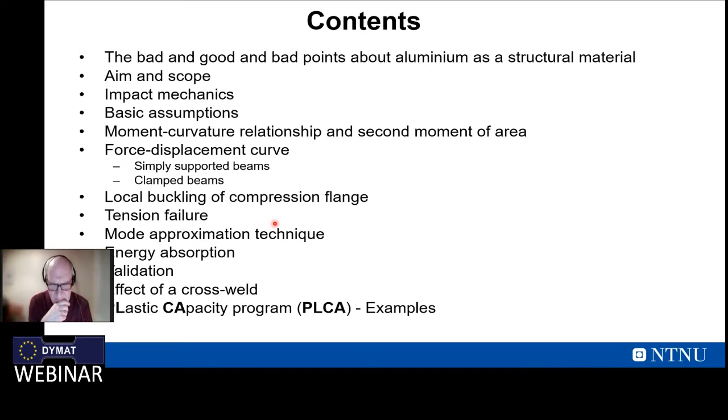Everything I've presented is then gathered in a spreadsheet. We call it the PLCA program. So at the end I will give a few examples.

Aluminum, the bad points: I suppose you know that aluminum costs much more than steel. But if you have a structure and you get a 50% weight reduction by using aluminum instead of steel, the price for the aluminum structure is more or less the same as for the steel structure. But remember, then you have a 50% weight reduction.

Effect of temperature: aluminum weakens more than steel, which can of course be a problem. We have a link to buckling, and the elastic modulus is lower than steel. This also has an effect on deflection.

When you weld aluminum, you have a heat affected zone where you have reduced mechanical properties locally, which can affect localization of strains when you have large deformation of a structure. Fatigue limit is lower, and thermal expansion is twice as much as steel.

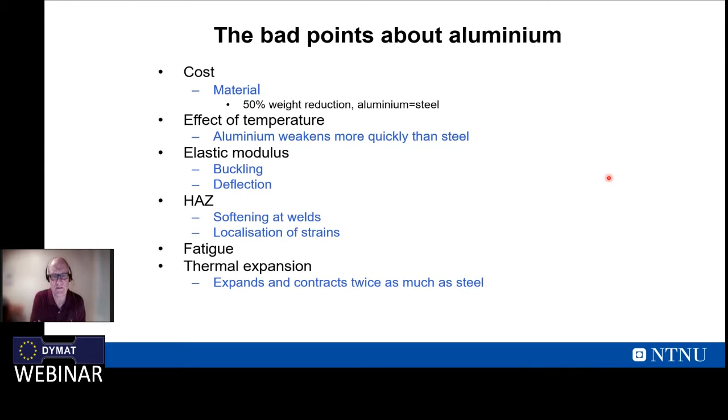So why do we use aluminum? Well, the good point is that low weight has a huge impact on what happens in the automotive industry today. We have electrification and the battery is quite heavy, so you need to reduce the body weight of the structure. Aluminum is a chosen material for this.

For instance, if you have the extrusion process, you can extrude a cross-section which you design on your own. It's quite cheap to extrude.

Recycling is very efficient - when you recycle a material, you use approximately 5% of the energy needed to produce primary aluminum. And 75% of the aluminum today is recycled, as I understand.

You have low temperature performance, so when you go down in temperature, you increase the fracture stress, increase the fracture strain, and so on. It's non-rusting, has good machinability, and also good energy absorption capability.

If you look at specific energy, for instance, which is the energy absorbed divided by the mass of the absorber, it's much better than steel. That's why today, for instance, you have bumper crush box systems in aluminum.

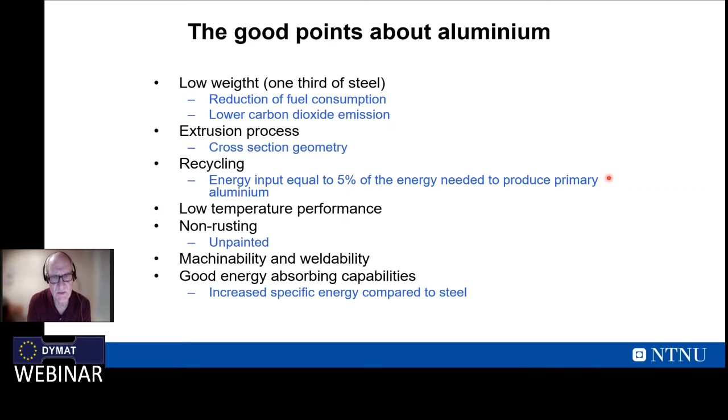I can give an example here. This is an Audi TT, and the body cell weight here is 206 kilos. By introducing aluminum here, you're able to reduce the body weight by 48%. You see that you have only steel at the rear part here - the rest is castings, sheets, and the blue is extrusions.

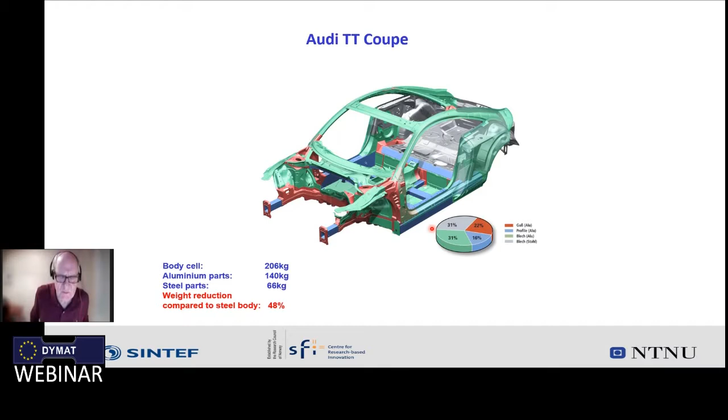And I can tell you that also in this new Audi e-tron, there are approximately 800 kilo of aluminum.

In the oil and gas industry, there is also a lot of aluminum, in living quarters. This is a tension leg platform, it's a floater, and definitely the weight on the top side is critical. To reduce the weight, you, for instance, use aluminum. I will not go into more detail, but this is a very interesting material in the offshore oil and gas industry.

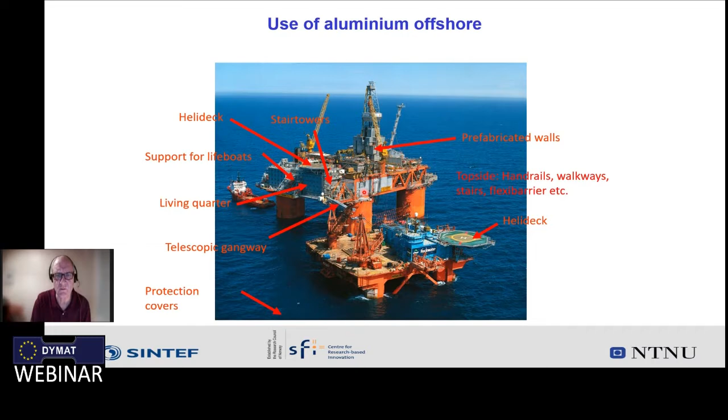So the aim and scope of this is to study the behavior of aluminum beams subject to impact loading. Focus is placed on support conditions, cross-section geometry, impacting mass and velocity, as well as material properties.

If you know the design code, Eurocode 9 for aluminum structures, all cross-sections are in class 1 and 2. This is linked to the b-over-t ratio of the element composing the cross-section. The energy absorption here is linked to material failure on the tension side and local plastic buckling on the compression side. And then I will also show the effect of welding.

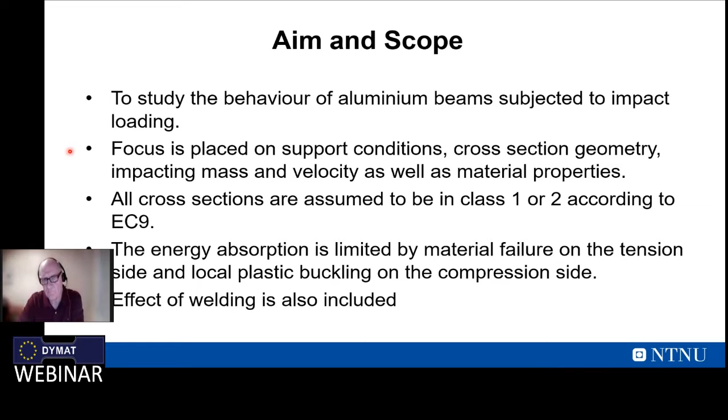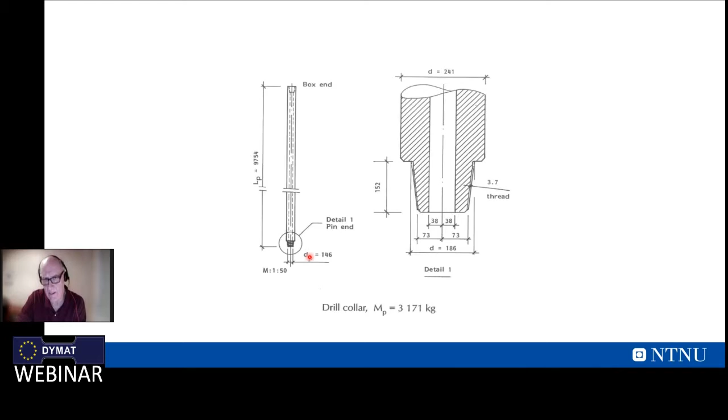And how to study the deformation? At that time we had only one high-speed camera, and we had to use 120 meters of film - we had no video camera at that time. To study the movement or deformation of the plate when impacted, we used some pins with crosses, and then we were able to film the crosses and study the movement.

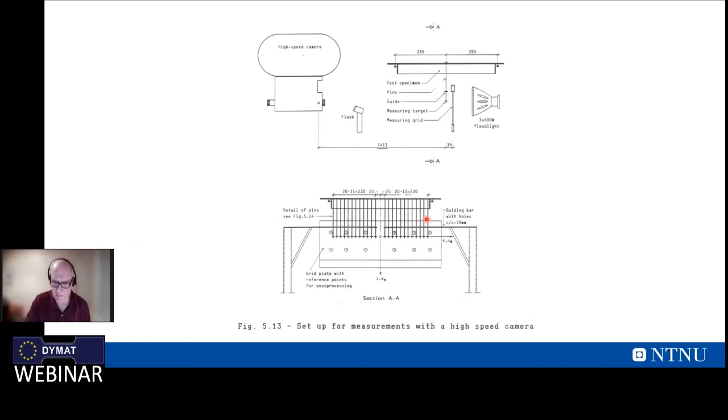Here you see what happens. This is at time t equals 0, and then the pin starts to move as a function of time. At time 1.1 milliseconds, the disturbance or wave has moved all the way to the supports. Here is also some numerical simulation done in the 80s, and you see clearly a circular disturbance moving towards the supports.

Actually this was done on LS-Dyna, by John Hallquist himself, when he was working not at LS-Dyna but at Dyna 3D, at Lawrence Livermore, at the lab at Livermore, before he started his own company.

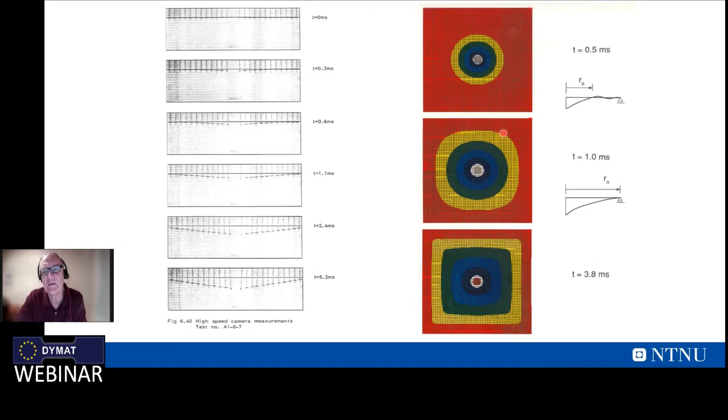This is the force-time curve - the force between the plate and the impactor as a function of time. The first part is where the support does not record any forces. Here the forces and supports are fully activated. If you transfer this into a force-displacement curve, you see the supports are fully activated, and a lot of energy is absorbed in the transient phase of the impact.

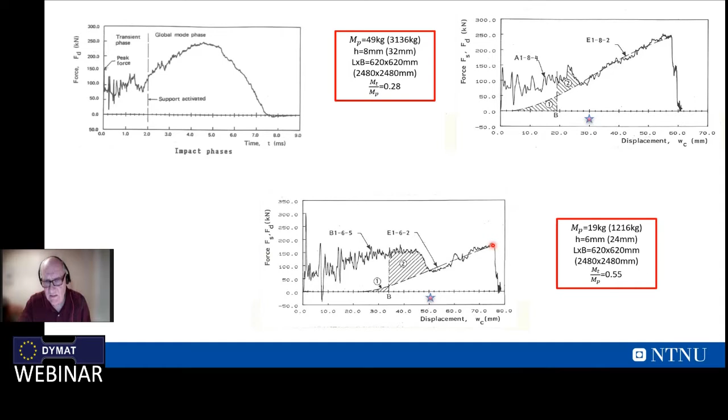Definitely you need systems to calculate this. You can do it with a computer code, but it's also interesting from an engineering point of view to have tools to design a beam or plate subject to impact, taking this into account. As you see, a lot of energy is absorbed - the dotted line here is the corresponding quasi-static curve, and this is where you get plugging in the plate.

So if you take a beam and an impacting mass, you can calculate that the kinetic energy of the impacting mass is absorbed as strain energy in the beam, multiplied by a correction factor to take the transient phase into account, where we use the mode approximation technique, which I will present later.

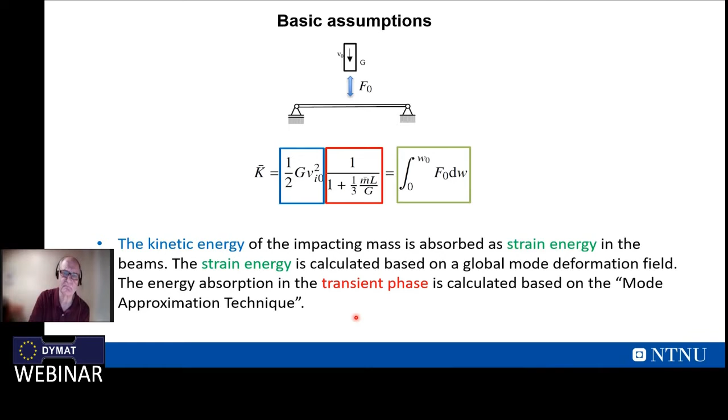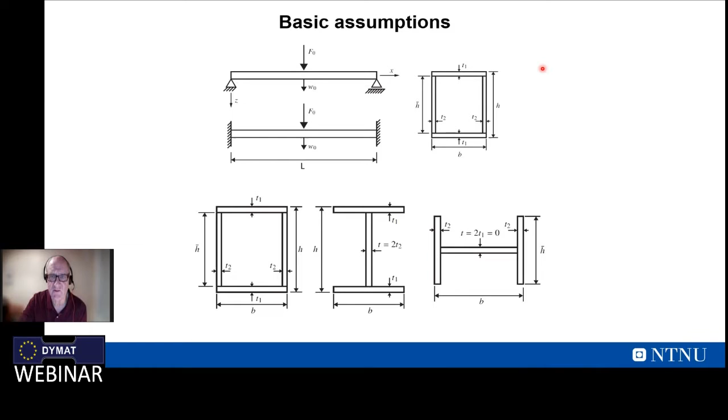We then looked at a simply supported beam, clamped beam. I have a rectangular hollow section, and from this I can very easily generate an I-shape by moving these two webs together, and I can also study the behavior of an H-beam. So I can easily study the behavior of three different cross-sections.

What I did to calculate the force-displacement curve is assume that the total strains are additive - the elastic and plastic strains are additive. I also assume a relationship between the plastic strain and plastic curvature, same for the elastic strains and elastic curvature. By introducing this, I can say that the total curvature is the sum of the elastic and plastic curvature.

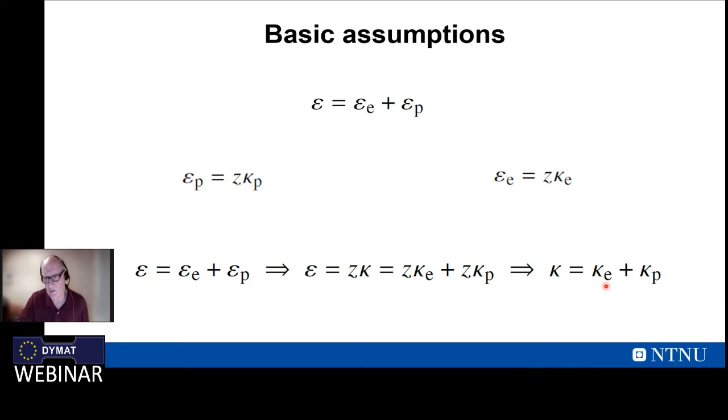So the moment-curvature relationship is like this: plastic, elastic curvature, and then we have the moment. Assume that you go up and then you unload like this.

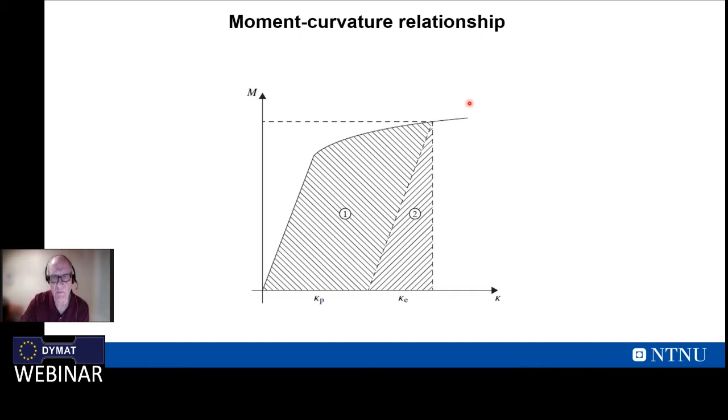The moment curvature relationship - here is the moment in a cross section, stress times Z times dA integrated over the cross section. Then I can introduce sigma, introduce EP, and get this term, and integrate over the cross section. You see I'm able to get an expression where the moment in a cross section is a function of the curvature, the material properties, and the cross-section geometry.

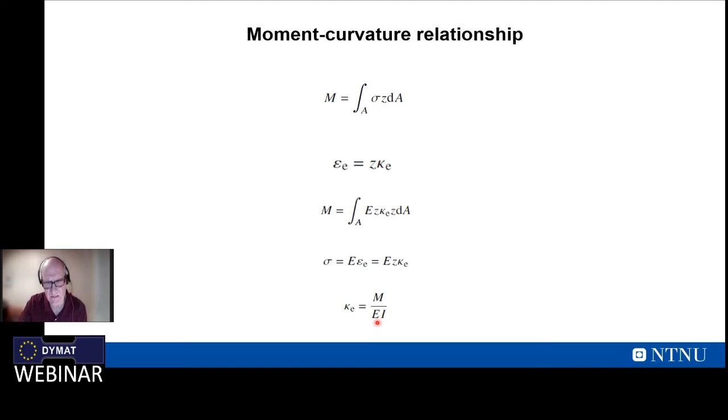This is a term that I want to use in the future. For the elastic part it's approximately the same, and I can obtain the well-known term that the elastic curvature is the moment divided by elastic modulus and the second moment of area.

Second moment of area is, you see here, very easy to determine, and then you can get expressions for I-beams and H-beams.

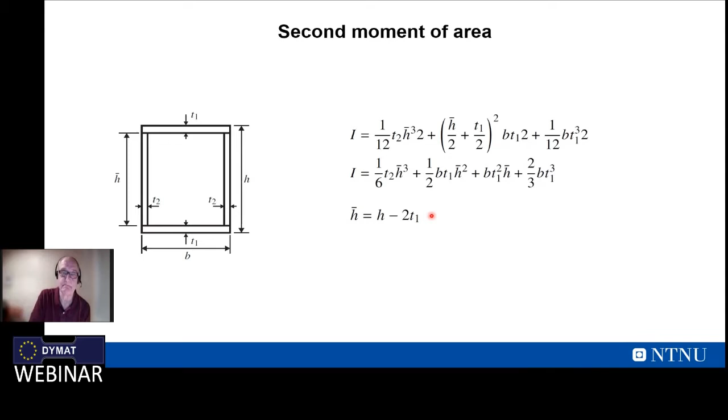How to calculate the force displacement curve? Well, I use the principle of virtual complementary work, or virtual forces, which says that this is the external virtual force, this is the internal work, and then you have an equilibrium, and then you keep the displacement constant, and then you vary the forces, which means that you also vary the stresses.

And then I can introduce epsilon here into this equation, I get this, and then I can integrate over the length and cross section, and then I get two terms. I get this term, which is from the elastic part, and this is from the plastic part.

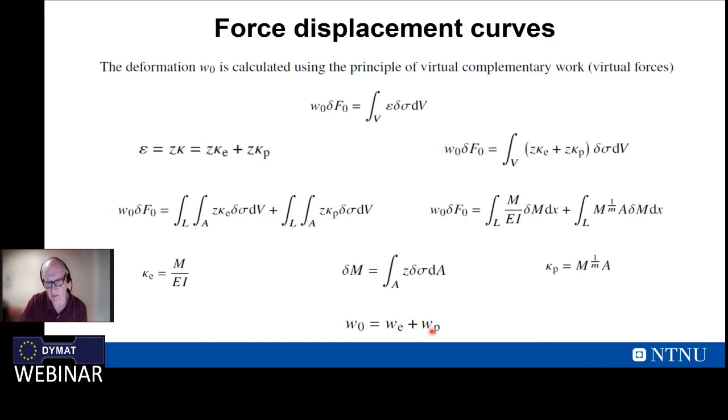And here we know that this is then also a function. This is the external moment, which is a function of this. So this will be deleted. And then you will be able to find that the total displacement is the sum of the elastic part and the plastic part. The elastic part is something that we know very well.

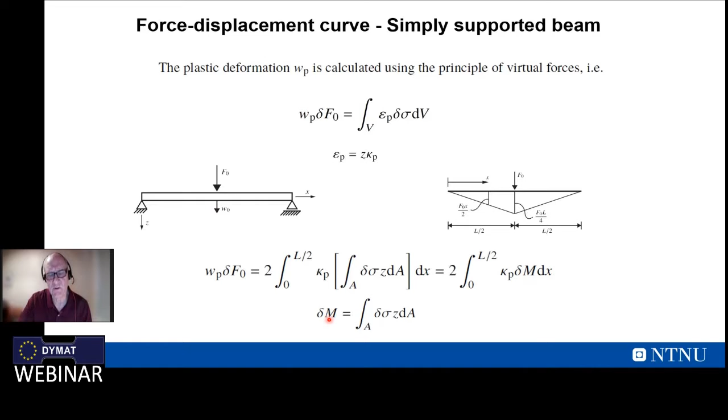So I will now calculate this for a simply supported beam. This is the plastic part. This is the virtual work. This is the virtual moment. Here is the moment diagram.

And I will not go into detail, but this is then the plastic deformation, which you see again is a function of M, which is a material property K, and the cross-section geometry. And the elastic deformation is like this.

So if you shall calculate now, for instance, the force as a function of displacement, you have to do this numerically because it's impossible to solve it directly. So you have to introduce this in here, this here, and then you have to do this numerically.

Find the relationship between force and displacement.

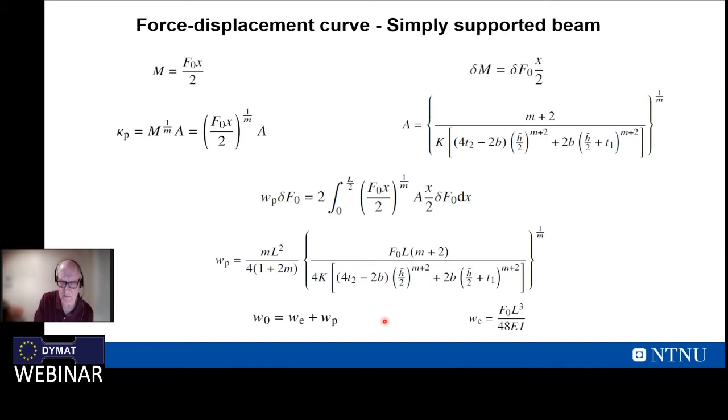Then you can also very easily calculate the plastic strains, which is important. In the outermost fiber on the tension side, in the midsection, the maximum plastic strain can be given like this. But we can also calculate the plastic strain as a function of x along the beam, which is interesting, because you will see that the material properties have a huge impact on how the strains in the beam will localize.

And this is an advantage of aluminum, because if you want a certain material, you can change the properties by heat treatment.

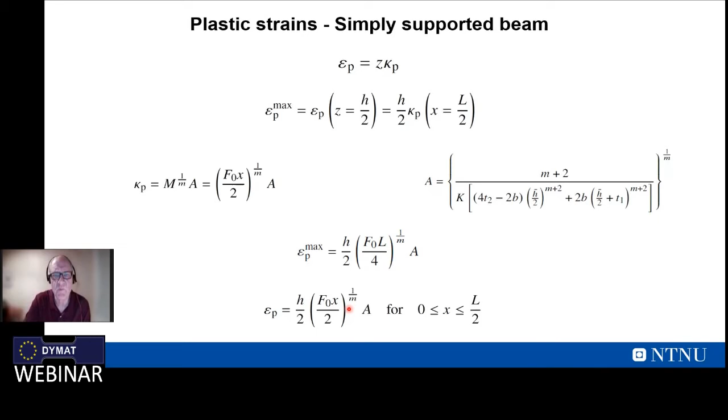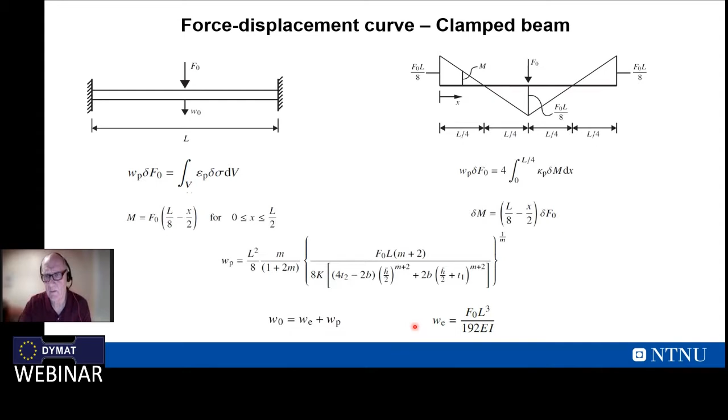And again, the plastic strains. What's interesting here is the plastic strains in the beam as a function of x.

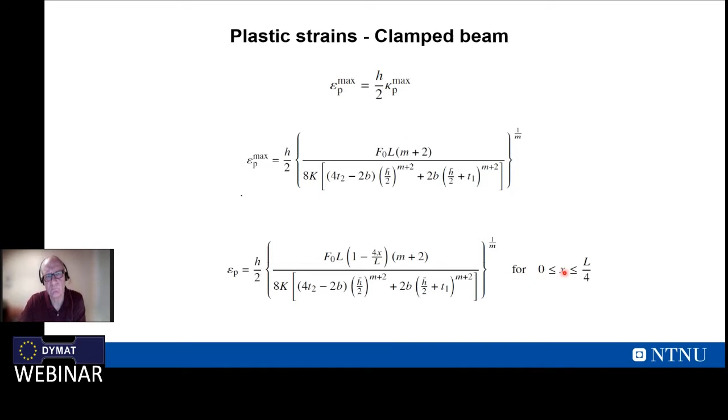So then we have been able, hopefully I will show later how this is validated, to generate the force displacement curve. And for aluminum, we know that when you have high strength aluminum, often you use that because it's beneficial with respect to energy absorption.

You reduce the hardening of the material, which means that you reduce the ductility. And I will show that.

But we can also, on the compression side, have plastic buckling. And I will show a method based on J2 deformation theory of plasticity.

So this is the total strains. This is the effective stress, effective strain. I will not go into detail. I will say that this is the secant modulus of the material.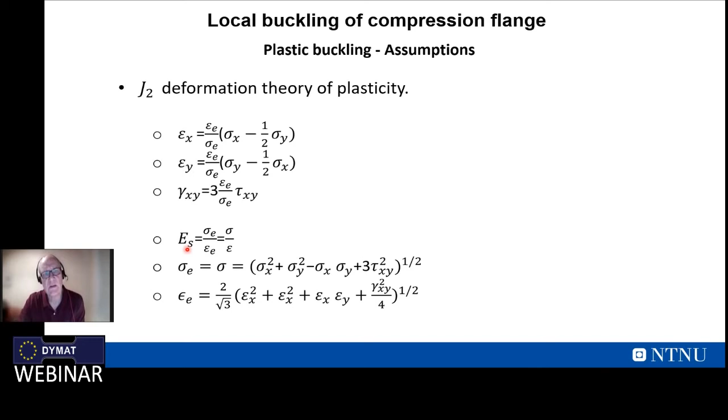And I will now assume that when buckling takes place, the plate here in the compression flange is straight before buckling and is subjected to only compression stresses. And I assume that when buckling takes place, there is no unloading.

And if you take an example from a column, for instance, it's based on the tangent modulus theory. And this is the Shanley theory.

And this is the reason why we have two buckling curves in Eurocode 9, because the tangent modulus is a function of the hardening of the material. The Poisson ratio is assumed as 0.5.

And what we assume is that the plates are compressed and that the stresses and the non-linear material properties vary from their pre-buckling values. This is very important.

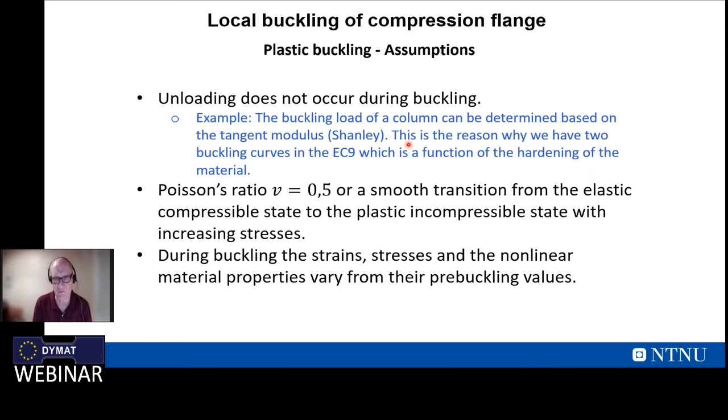It is now assumed that buckling will occur if the equilibrium state changes character, such that another equilibrium state is possible. You have an equilibrium, then it starts to bend, and then you find a new equilibrium. If that's the case, the plate has buckled. The buckling equation is given like this. It seems quite complicated, but it's not - it's the variations in the moments Mx, Mxy, and My, and also the normal forces acting on it.

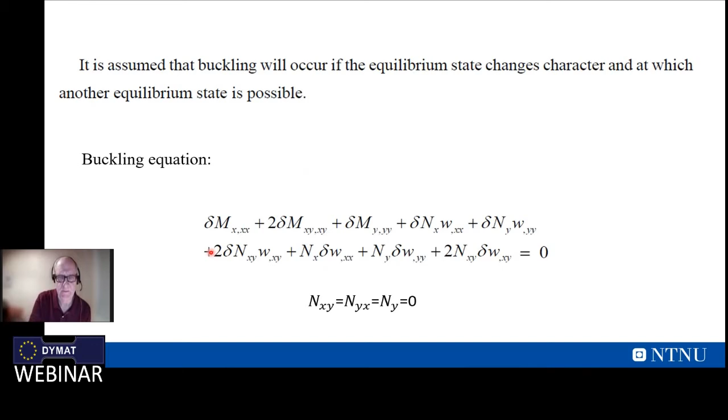Who developed this? I have not developed this theory, but it was developed by the National Advisory Committee for Aeronautics in 1948, before they had computers. They needed to do hand calculations.

Looking at this formula, you clearly see that when doing a numerical simulation involving folding or buckling of thin-wall components, it's totally wrong to use a bilinear stress-strain curve. You need to be very careful to accurately model the hardening of the material. This is very, very important - if not, you can get a totally different deformation mode.

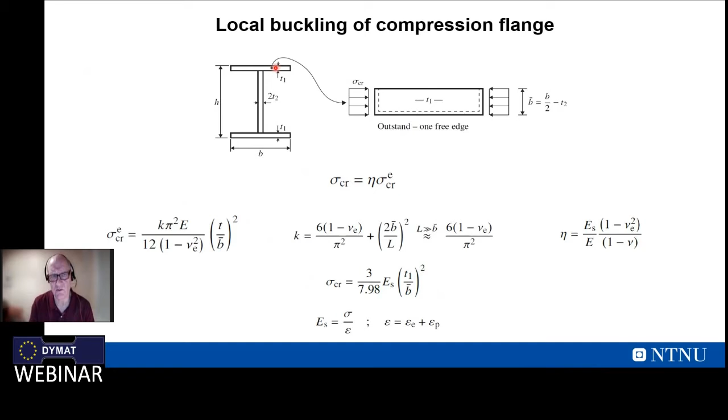I suppose some of you will consider that when you have a beam subjected to impact at the center, you have a gradient in the moment, meaning variation of the stresses in the flange. I'm not taking this into account here, because what I'm showing you now is a conservative estimate. I also don't take continuity into account in this case - in the design codes, you always assume this as hinged.

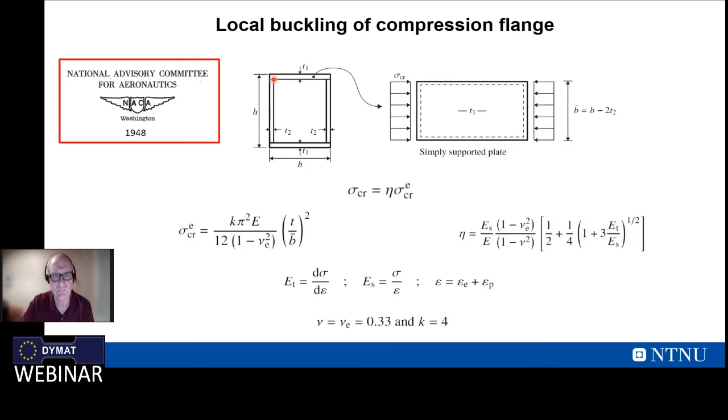If we plot these formulas for outstands and for simply supported internal elements, this is the buckling curve. This is the slenderness B over T, and this is the normalized critical stress. In the design code for aluminum structures, they are not allowed to exceed this stress here - not allowed to have higher stresses than the 0.2 stress. But you see that if you have a quite thick profile, or low slenderness, there is definitely some extra capacity here which you need to take into account.

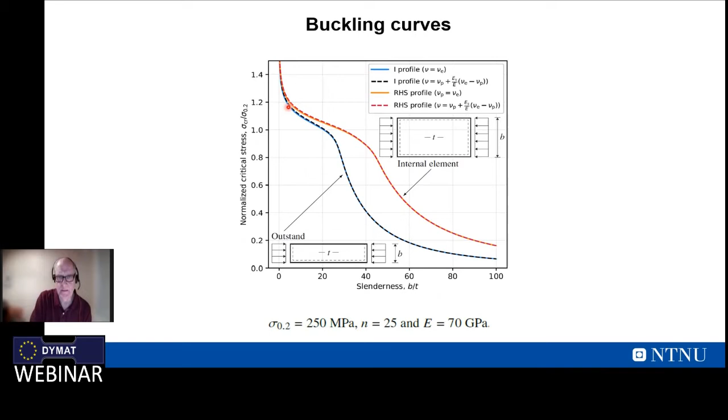Take, for instance - I don't know if you're familiar with the Eurocode 9 design code - but you see that this is for internal elements. You have different curves, and these curves are a function of the hardening of the material, the shape of the stress-strain curve, and this is for outstands. So we have 3 curves here, a function not only of the material hardening, but also of whether you have welding or not, because welding will introduce imperfections and residual stresses which impact buckling.

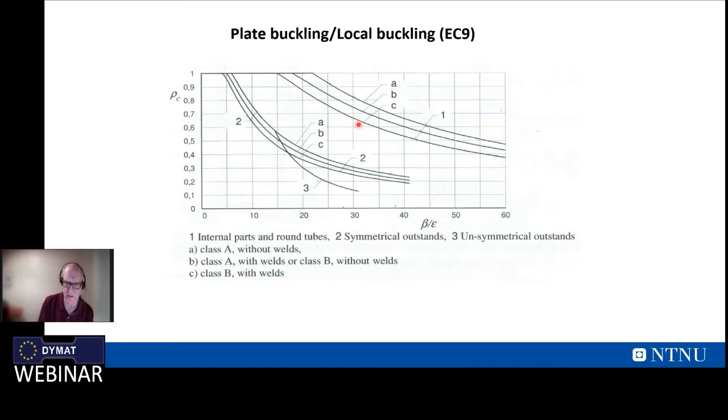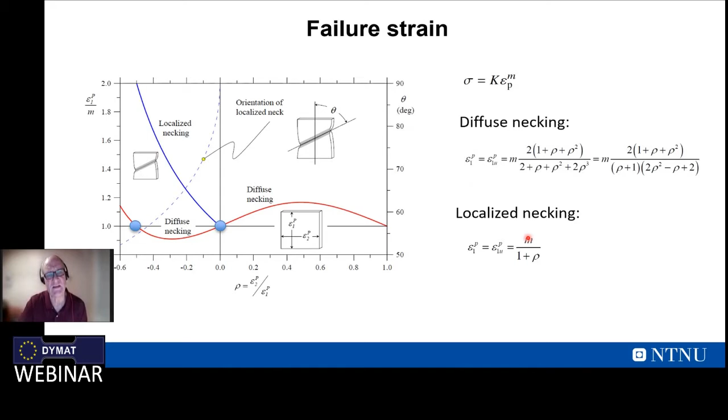Localized necking coincides with diffuse necking when rho equals 0. It's very easy, because if you have a stress strain curve like this, once you have determined M, you have a value which gives you when localization takes place, and then we say that game is over in the beam.

So back to the mode approximation technique. This was first proposed by Martin and Symonds. I think Symonds was a professor at Brown University in the US, and this was first published in the 60s.

If you look at this figure now, we know that if you have a stress and the E dot lying here, and if you have any other admissible state of stress here, sigma star, we know that this term is always positive. This is due to Drucker's stability postulate.

If now, for instance, this sigma star lies on the yield surface, then we can put up this, because this sigma star is associated with E dot star. And these two equations can then be combined into something like this. This has to be positive.

And then these two guys, Martin and Symonds, they utilize this to come up with something very simple.

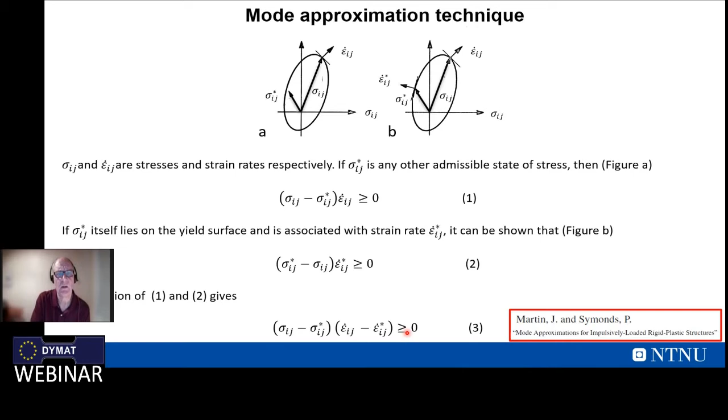When you have a structure subjected to, for instance, impact, we say that two solutions can be found which satisfy the field equations. We see that we have solution 1: we have a velocity, an acceleration, a stress, and then we have a strain rate.

Then solution 2 is associated with U dot star, acceleration star, stresses star, and strain rate with a star here. But the velocity field is often chosen on a modal form given like this. So this is a time function, this is a shape function.

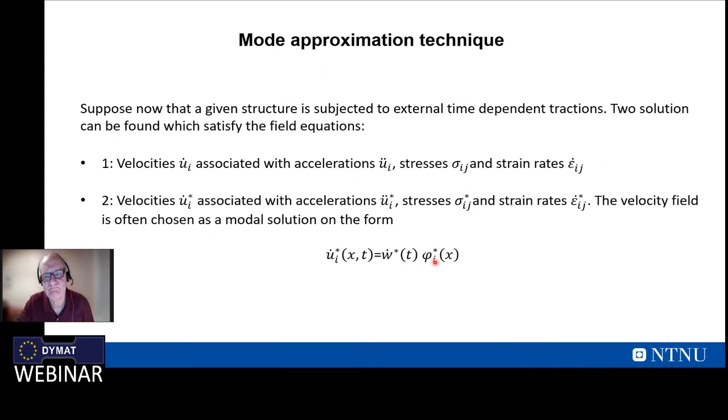Then they put up using the virtual velocities. It is assumed that when the tractions, inertia forces, and stresses of each solution here are in equilibrium, because this can be put up by virtual work, the difference in these quantities is also in equilibrium. So this is the difference, this is the inertia term, this is the strain stress term.

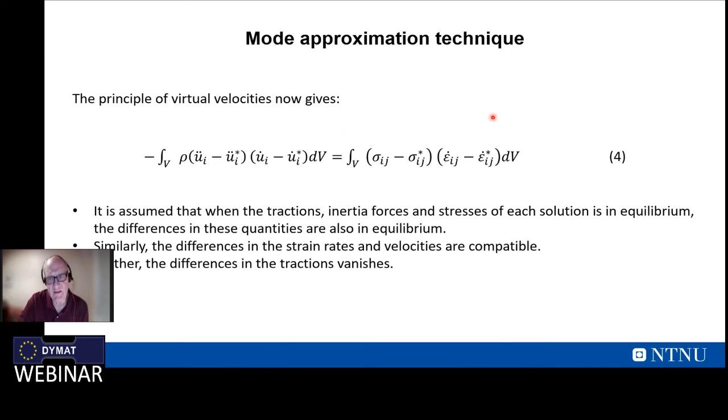So if we now further take this and play around with it a little bit, this is the term, and then we define a new function delta. And if we take the derivative of delta with respect to time, we end up with this.

But from equation 3, this is positive, which means that the derivative of this has to be negative. This implies that the difference between the modal solution ui star dot and the actual solution does not increase with time, but they are approaching each other. So this delta function is less than the initial function at time t equals 0.

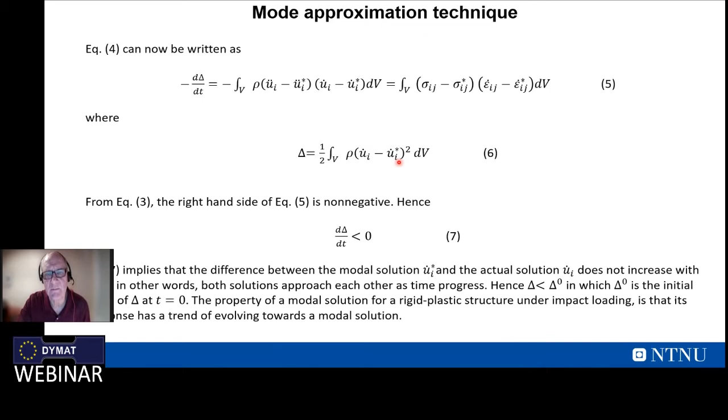And I will show now examples how to utilize this, because you have an actual solution. This is the real solution, and this is an approximate solution. And I will show how to utilize this to make your calculation quite simple.

This is an example of a cantilever, with a mass at the end, an impacting mass, and it can be solved if we assume a rigid perfect plastic material, that in the transient phase you have a velocity field like this, and you have a hinge moving towards the support, and this is the global or modal solution.

So if you take the exact solution and plot it, here is the velocity of the tip as a function of time, and this is the exact solution. The mode approximation solution is this one. So we see that the two solutions are equal at some time, and they are equal from the time when this hinge has reached the supports.

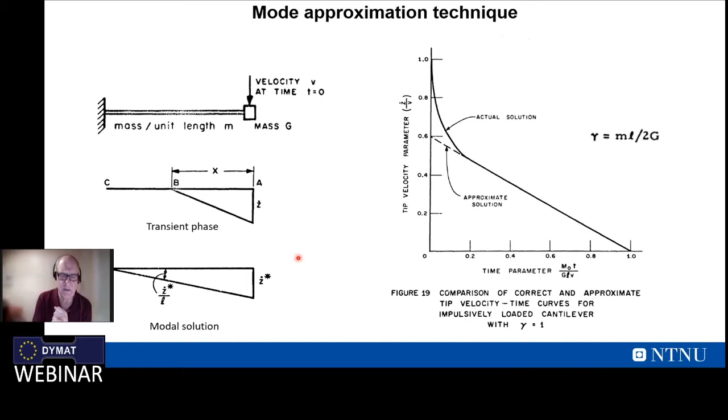I can tell you that to do these calculations, it will take you one day. It's quite heavy, so from an engineering point of view, it's quite hopeless to do. So you need something simple. Even to put up a numerical simulation can take you a lot of time. So at least this can be used as a first approach using this mode approximation technique.

So how do we use this? Well, here we have a beam, a simply supported beam. This is the real velocity field. At impact, we have only velocity in the center, and this is the mode velocity field, where we assume a velocity field like this at time t equals 0, where this velocity at the center is different from this velocity.

And now I use this formula here at delta at time 0. This is the actual field, exact velocity, and this is the mode field. This and this is the mode field, where this is known, this is the shape function, this is the unknown.

And then I can introduce this here, and then I can take the derivative of this with respect to this and minimize the difference between the real solution, real velocity field, and the mode field. And this is given here. And then you see that I get an expression for v i0 bar.

By doing some calculations, I can find this expression: v i0 bar is equal to v i0 divided by a term which is linked to the mass ratio between the beam and the impactor.

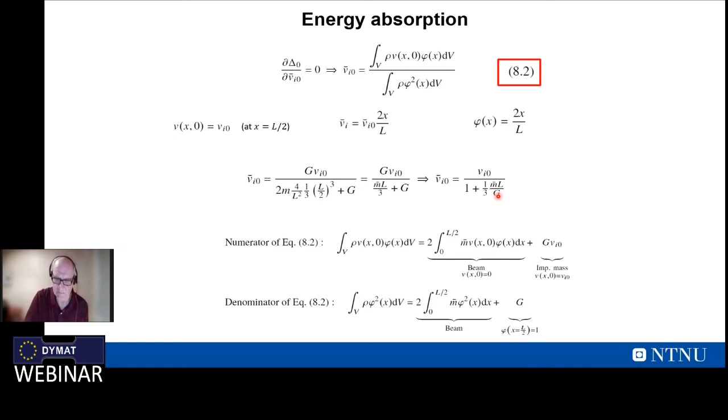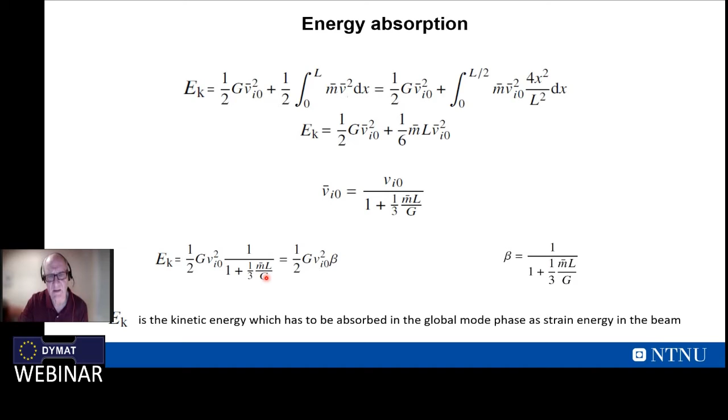How do you utilize this? My initial kinetic energy is linked to this system. I can put up the kinetic energy for the impactor, the kinetic energy for the beam, and introduce this. The kinetic energy which has to be absorbed is the initial kinetic energy multiplied by a factor, which is a function of the mass ratio between the beam and the impactor, making the calculation quite easy. Then I get rid of these one-day calculations.

So what do we have? We have kinetic energy, which has to be absorbed as strain energy in the global mode phase. This has been programmed because there are a lot of equations in the spreadsheet. We are not assuming any rate effects, they are neglected. I'll also show you what happens if I introduce a cross weld at this position.

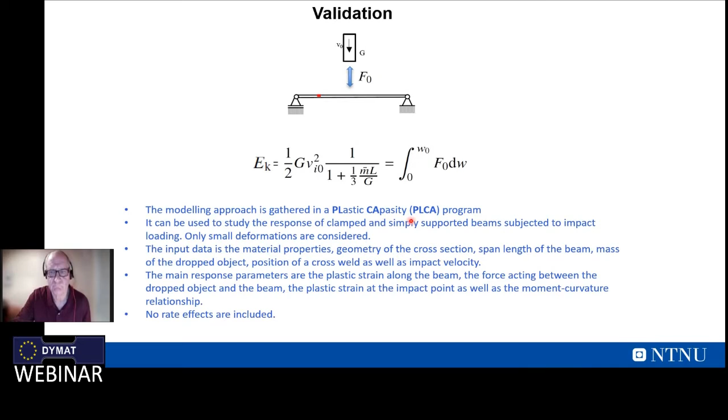Norman Jones has a book called Structural Impact, an excellent book for people working with impact dynamics and plasticity. He has an example with a clamped beam subjected to a dropped object or falling mass at the center. He has defined the transient phase, this is a velocity field and global mode field, and he has an exact solution for the displacement like this, which again is a function of the mass ratio. You assume a moment theta rotation relationship like this.

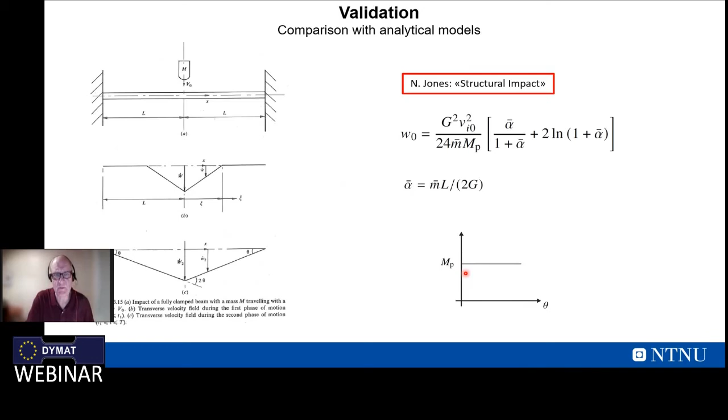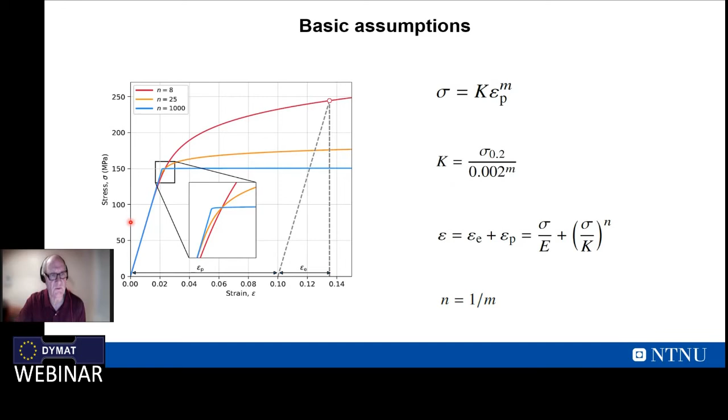Now we have compared this solution with the mode approximation technique. When comparing, he has a perfect plastic material, so here we need to put E equal very large, almost infinity, and a large value n, so we have an almost elastic, perfect plastic material in the spreadsheet.

This is the Norman-Jones solution. This is the displacement, dimensionless as a function of the mass ratio. The black curve is the exact solution by Jones, and the mode approximation technique gives you this. Very good comparison. If you want to be a real engineer, you don't use this mode approximation technique.

You say, for instance, you have a clamped beam and a dropped object, you have the kinetic energy which is then absorbed as plastic energy in the hinges here. Then you can put up this, plot it, and you see this is the line here. So when the mass ratio is 1, you definitely get a very conservative solution. So if you want to be a little bit more accurate, which maybe can be the case for you, then you should try to use this mode approximation technique.

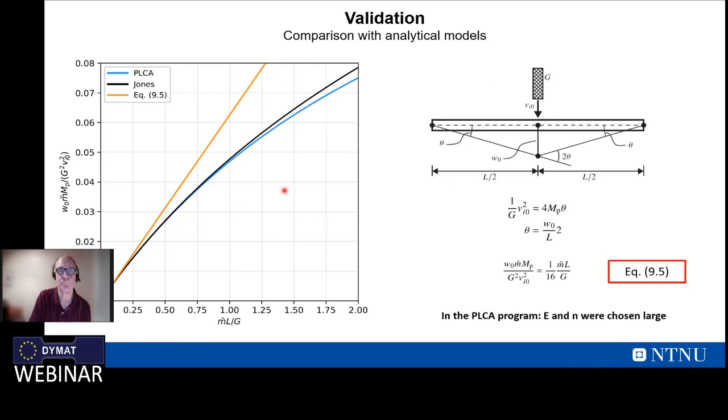We have also done some comparison between this mode approximation technique and numerical simulations. You will find a lot of comparisons in the literature, but if you look at the force displacement curve based on the principle of virtual forces, this is for a simply supported beam, this is for a clamped beam for a T4 material where you have the yield stress. N is equal to 8, and you see that the Abaqus solution and this PLCA solution are more or less the same.

We have also done simulations with shells, and here is a shell solution. You see that here we got buckling using the formula from NACA, and here approximately we get buckling in the Abaqus simulation. This is the same for a T6 alloy, where the yield stress is 250 and n equals 25. Still, the force displacement curve is well represented, and the analytical model gives quite good predictions of when buckling takes place.

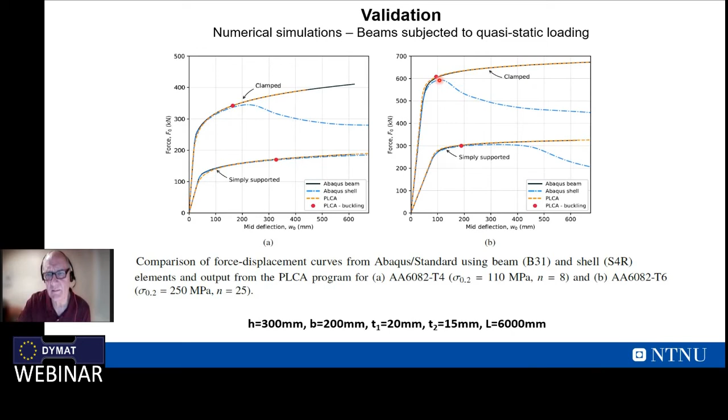We have also done some studies linked to comparison with impact. Here is the ratio between the Abaqus displacement and this simplified model using the mode approximation technique as a function of mass ratio. For a tempered T4, T6, we are within plus minus 10%. So from a design perspective, this looks quite promising.

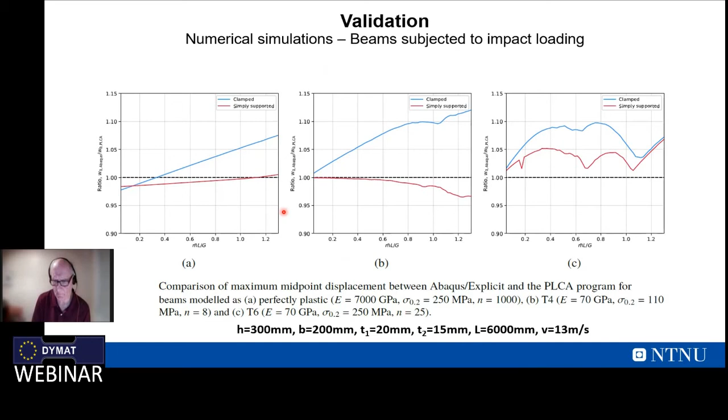If we now introduce a cross weld, then we have a challenge, and this is something people do not know, because if you have two plates welded together, you have a weld here, but you also have a heat affected zone. If you take this stress strain curve, obtained from a small specimen out here, then you have a stress strain curve like this. But as you move towards the weld, you see that the yield stress lowers and the hardening changes, and in the heat affected zone close to the weld, you have a curve like this.

So for this alloy, which is a 6082 T6, you lower the yield stress by 50% by moving from the material out here to what happens in the weld. And when you stretch this, it will definitely have an impact on how localization takes place and how your structure will behave when subjected to an impact.

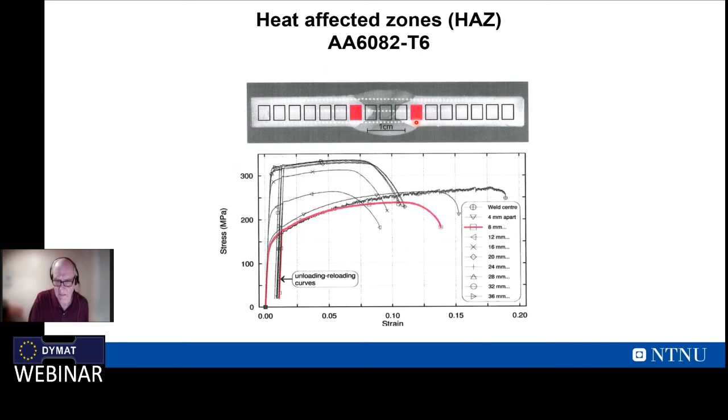Again, done. We have put up some formulas linked to using the virtual forces.

We have a weld here done for a simply supported beam. This is the base material, and this is the properties in the heat affected zone. So we then give in the length of the heat affected zone and the position.

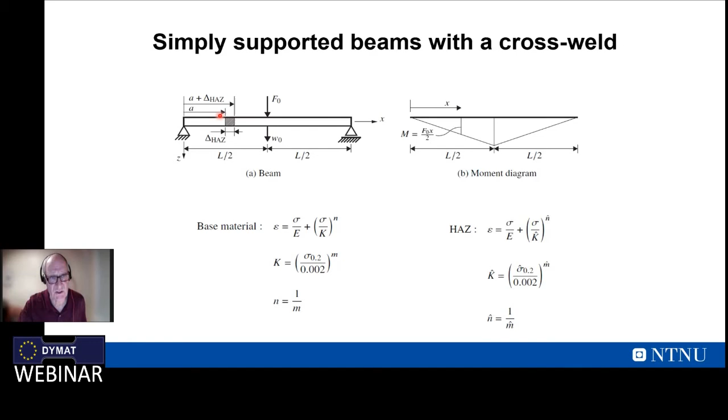Quite heavy calculations, but the nice thing with these calculations is that you have control over the parameters. This can be used in design, but also for students to learn which parameters count or not. This is very important because when you do a numerical simulation, you don't see anything, you see a black box, but here you can understand the effect of mass ratio, the effect of material properties, and so on.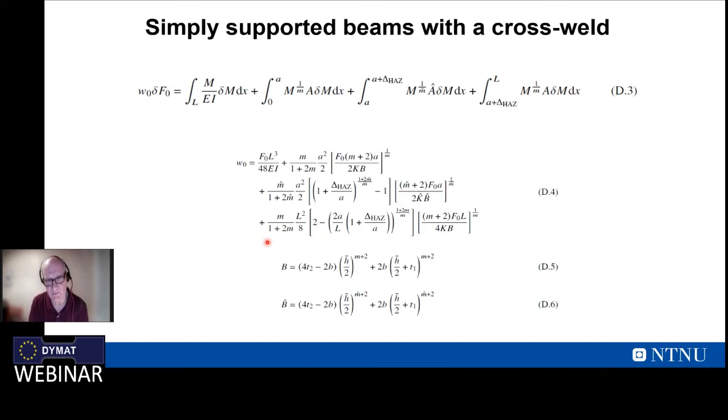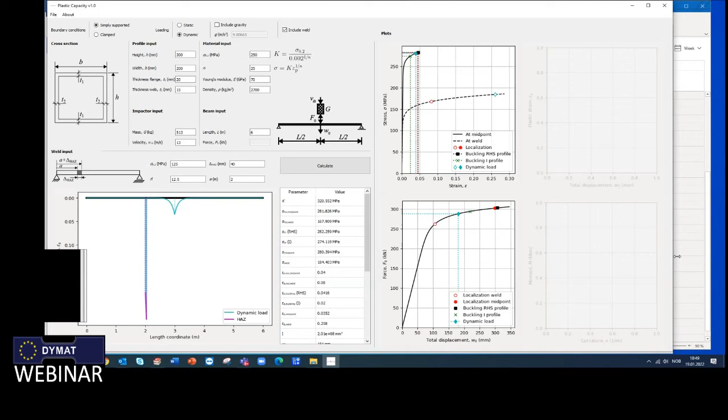So then I will show you the spreadsheet. Maybe I can go out of this. I need to go out of this. Started this again, hopefully, if I can. No, so not this one. Well, maybe I should share screen instead. Hope you see this. Yes, it's perfect.

So this is a spreadsheet. What's interesting here, you can look at simply supported clamped beams. This is the cross section. We can then have static dynamic loading. We can include acceleration of gravity, and we can include welding.

And here I have an example where I have a height 300, 200, thickness of the flange is 20, web 15, which means that we are in class between 1 and 2. I have a T6, where the yield stress is 250, N equal 25, Young's modulus is 70 gigapascal, and the density.

And here, now I will first turn off the weld, impacting mass like this. And then I can do a calculation.

Then you see here the plastic strain along the beam. And here you see the stress strain curve. And here you see the force acting between the impactor and the beam.

And if you look at this, we see that here is the load situation I've chosen. And here I get diffuse or localized necking, which is the red dot. And here I get buckling of the rectangular hollow section profile in the compression flange. So here it seems to me that everything's fine.

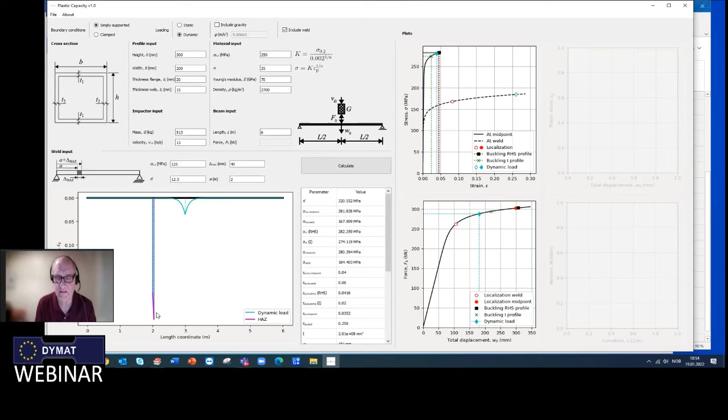And this is one of the challenges with aluminum, that when you weld, you have to be aware of where you put the weld compared to the deformation of your structure. So yeah, I think that this ends my talk.